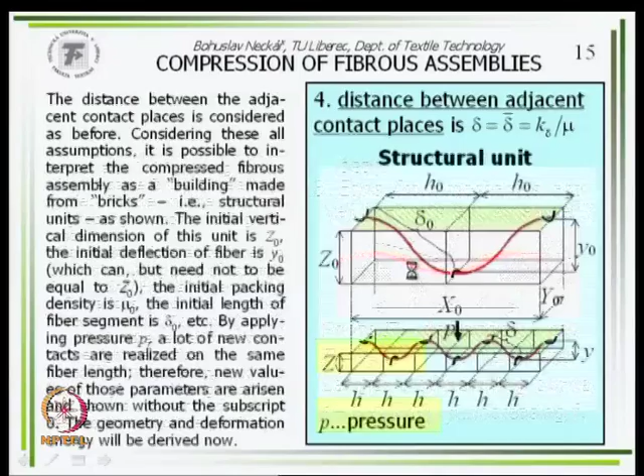Nevertheless, for this force F, our colleagues from mechanical engineering derived such an equation - here it is, yeah? Only the quantity of deflection I now call eta. So it is this here. After that we must integrate this from the starting position to the final deflection y, so that we obtain this here, finally this here. This is the energy per one fiber portion of length delta.

How is the total energy? The total energy is energy per one segment times the number of segments, so E delta times M delta. Using this expression, we obtain this after rearranging. After rearranging we obtain this here, but here is y squared, and here is h to the power of 2, 3.

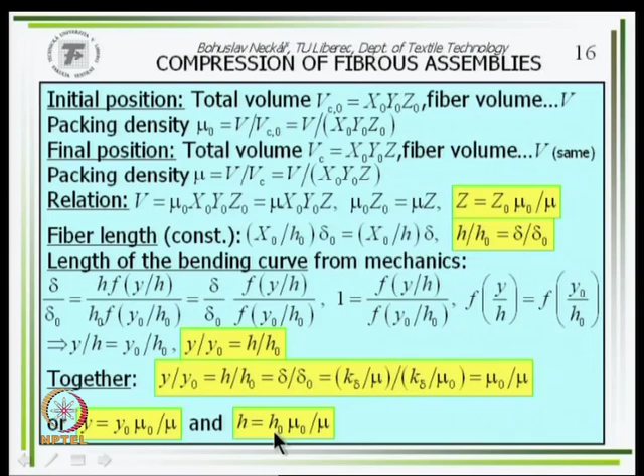Nevertheless, we know what y is - for y we have this expression, and for h we have this one. We use it, obtain this here, and after small rearranging, we obtain that the energy is something in brackets, some global parameter, times mu squared. This is the energy, and in the final position the structure has the packing density mu.

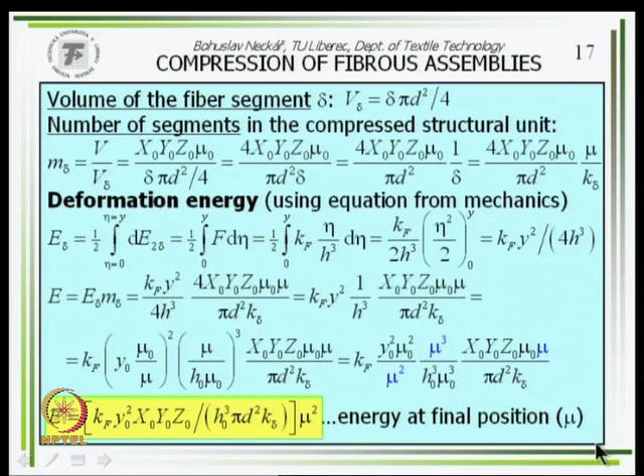Thus, on the starting position, the starting value of energy, which was in our fiber bundle or in our structural unit, is E0, and it must validate the same equation with packing density equal to mu0. This is the initial energy, so that the increment of energy delta E is this ratio times mu squared minus mu0 squared.

Now we need to formulate the work done. Work is a process. I have some starting situation, then I give some work, and I finish on a final position in a deformed object. So therefore I must use three types of quantities: starting value, general value on the way, and the final value.

For example, packing density - there are symbols which we will use. Initial value is mu0, final value is mu, but through our activity, the general value on the way from mu0 to mu is mu star. Vertical coordinate, I call z. Starting was z0, final was z, and on the way was z star. We derived that z is z0 times mu0 by mu, and similarly this equation is valid. On the place of mu and z, I use the star superscript, which are the quantities on the way from starting position to end position.

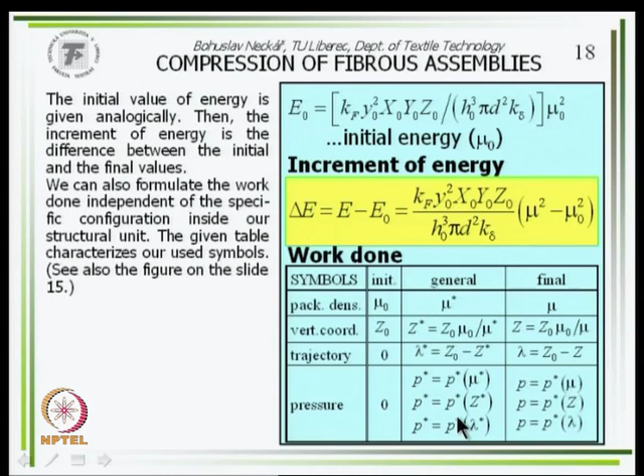Yes. How is the work done now? Same idea. The elemental incremental increase of our work is force times the differential quantity of the length. So how is the force? The general force on the way - pressure, for example P star as a function of lambda, times area x0, y0 as in our picture. So this is force times d lambda star, because it's some general characteristic of our way through which we press.

Now we can apply substitution twice inside of this integral. First is this here, then the second is this here, and finally we obtain work done as x0, y0, z0 times mu0, times the integral, because we need to sum these incremental works together. The integral from mu0 to mu of this expression. Here we have the pressure as a function of packing density - it is this function which we want to obtain, the relation between pressure and packing density. So it is a formula for work done.

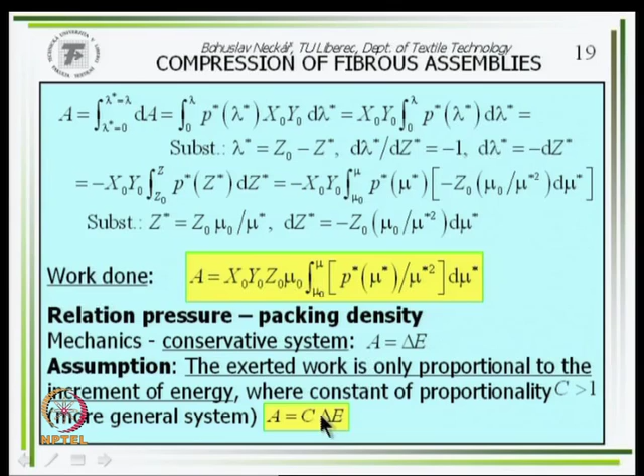Well, so let's use this equation, and on the place of A and delta E we will use our expressions derived earlier. So we obtain A equals C times delta E - it is this here. After small rearranging, we obtain this. Well, it's nice, but not too nice, because our function, pressure as a function of mu, is inside of this integral. What to do then?

Evidently, make some derivative, because it is inside of the integral. So make some derivative. Let's make the derivative of the left-hand side as well as the right-hand side - the derivative of this side by mu.

Derivative of the right-hand side by mu is very trivial, since mu is only here. But the question is, what is the derivative of the left-hand side by mu? Where is mu? There's no mu star, that's the integrating variable. Mu is the final variable, the upper limit of this integral.

The question is, how is the derivative of an integral where the variable is the upper limit? I hope you know from mathematical analysis that this derivative is some expression known from mathematics: this derivative is the function where, on the place of the integrating quantity x, now is the upper limit y. It's some formula from mathematics. After our lecture we can derive it mutually, it's very trivial.

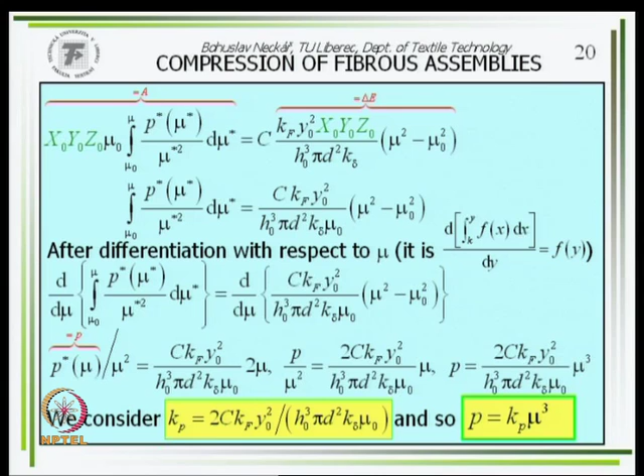Pressure is proportional to mu to the power of 3. This is the result of Van Wyk's theory, from direction to relation of pressure and packing density.

Van Wyk studied how it is now with experiment and was very happy. He worked in South Africa, where they used wool fibers, merino wool at most, and pressed it into bales, and it was in very good relation to his experimental experiences. So, Eureka, this is perfect. From that time, a lot of people use Van Wyk's formula.

Nevertheless, this formula is not well enough for all packing densities. You can see this fast when you apply this formula to the modeling of yarn internal structure, yarn packing density, and so on - your result wasn't good. Something is not right. Let's see how this equation is.

P is proportional to mu to the power of 3. So it goes over, so that at a sufficiently high value, P represents Kp times some real constant. So when you use some finite value of pressure, you obtain mu higher than 1. This curve goes so that from this value of pressure onward - this is pressure and packing density.

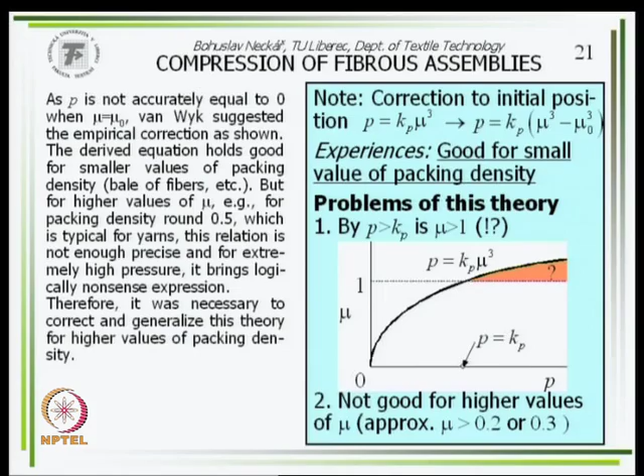Why? In the system, the model of Van Wyk, which is good not only for wool fibers, a lot of other authors checked this equation and said yes, this equation is good for packing densities of maybe 0.2 to 0.3. When your packing density is 0.3 and smaller, then you can say that this equation works very well.

But why is it not good for higher values of packing density, which we use for example in yarn? In the yarn we have packing density at most between 0.4 and 0.5, 40 to 50%.

Why is it possible? Because to solve this problem, to this moment it was a pure Van Wyk theoretical concept - only the derivation was a little different, I used a little other way to obtain it. But as a theoretical model, the result is still Van Wyk's model.

Because of this problem with such a model, we derived some generalization of the Van Wyk concept. It is based on the following idea: the contact between two fibers is usually not only a point contact. There exists some small area, a contact area, between two fibers.

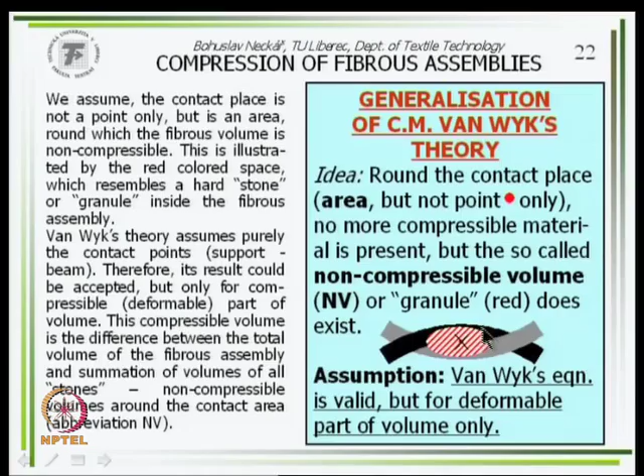And around this contact area, the volume functions as a stone inside, let's imagine it. With this part of my finger I can move with these two, but here it is like a stone - some small stone, some granule. So this is some non-compressible volume, isn't it?

So we said to ourselves, okay, it is a non-compressible volume, and Van Wyk theory is valid - well, it's valid, but not for the whole volume of the fibrous assembly. In each moment it's only valid for the deformable volume, which is the total volume minus the volume of such stones, which are non-compressible. Can you imagine it? I think principally yes.

So let's give the following idea. Earlier, Van Wyk's original equation is Kp times mu to the power of 3, where mu is fiber volume by total volume, both to the power of 3. This equation is this relation of two quantities, P and total volume. Volume of fibers is practically the same, yes, we say no, total volume - we must in this place give the deformable volume, which is total volume minus the volume of all our stones, our granulas.

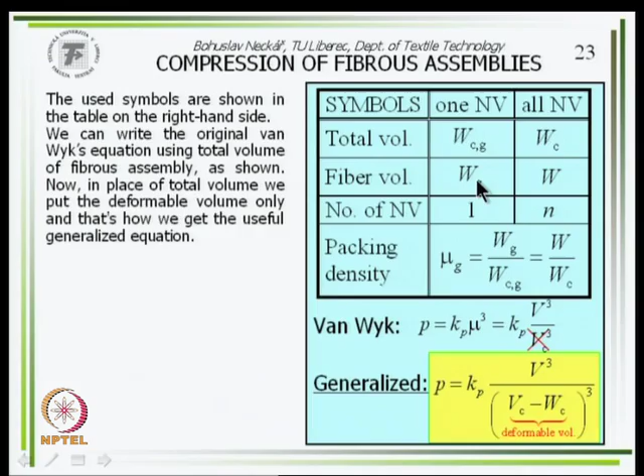The problem now is to formulate how the non-compressible volume of all granulas, the volume WC, and this WG volume, fiber volume inside one stone, one granula, one non-compressible volume, is generally not constant.

Because do it subjectively with your fingers: by light contact, you can feel that this volume is small, this non-compressible volume is small. Also the fibers, volume of fibers in the whole granula is small. From the other side, when we have some contact which is very intensive, the contact area is large, whole granula is big, and the fiber material inside our granula, the volume of this is high.

So volume of fibers inside one granula is related to packing density of the whole structure. When we have higher packing density, the volume is higher. So it's some function, an increasing function of packing density. It must be so. Acceptable? Yeah. Sorry, we have not a theoretical model for this moment, we only know it is some increasing function.

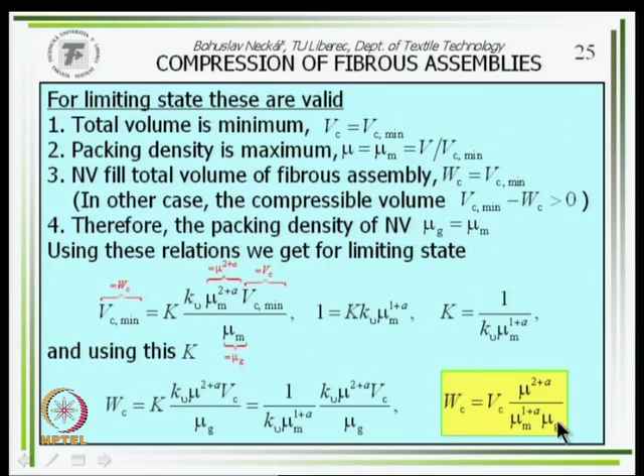And now we have two packing densities here: maximum value of packing density, and packing density inside of granula. We can well imagine that both are the same, that inside of granula is every time a maximum packing density. Only a small necessity gaps inside fibers.

Then, using this assumption, we obtain the W with subscript C is VC times mu by mu m power to 2 plus A.

And this we use in place of our generalized idea: total volume minus volume of all non-compressible parts. After small rearranging, using the packing density as fiber volume by total volume, we obtain this here, and finally we obtain this equation.

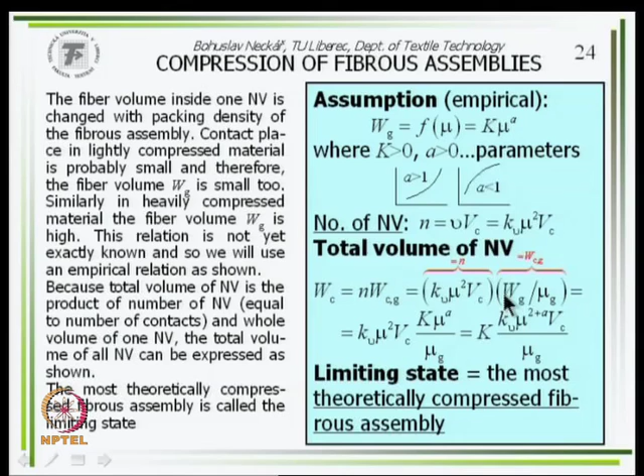Based on our experiences, mu m is usually very near to value 1, maximum packing density, and the parameter A, which is here, based on our laboratory experiences, this A is near to 1. It means this relation is straight.

And then we obtain such curve, such diagram: pressure, packing density. This is our new generalized function, and this is the original one, Van Wyk's curve.

In the region of small packing density, we obtain roughly the same graph, same shape. Then by higher values, our new curve is limited to maximum packing density, something which is very near to 1. It's possible to do some approximation, because it's formally easy, but you can read it later at home.

I want to comment on the relation between our generalized equation and experiments which were done by Baljasov. Professor Baljasov was earlier a known name in Moscow, at Moscow Textile Institute.

He studied experimentally this relation, pressure and packing density, in a very large interval of pressure, from 0.0003 megapascals to 328 megapascals. He used for smaller values our breaking machines.

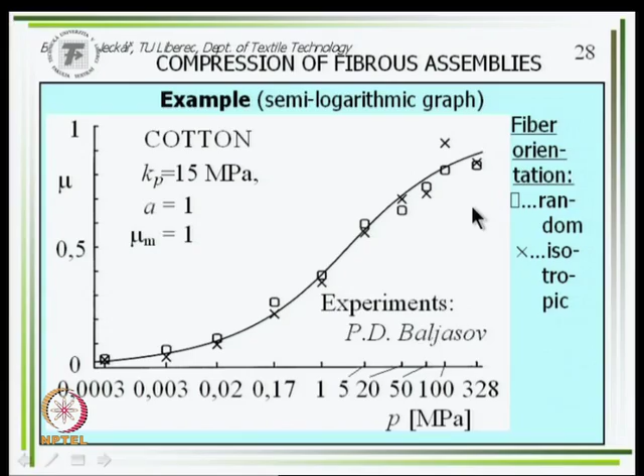Higher value, it is the production of fiber boards. It is not textile technology. So you can see that this result is very good, acceptable.

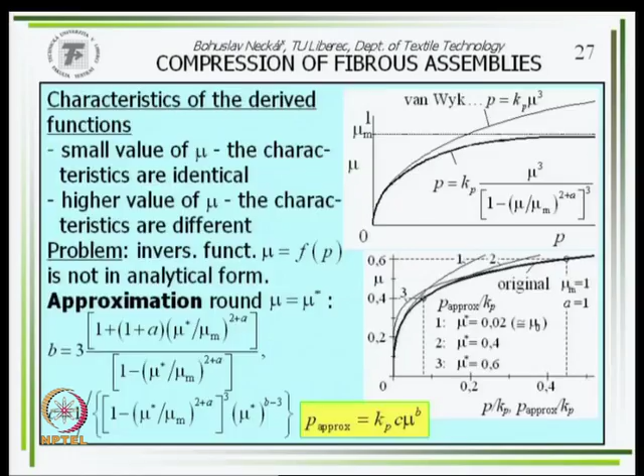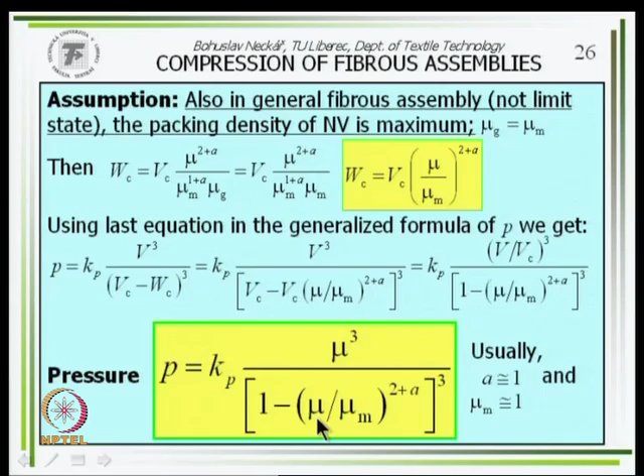We will use it in one of our later lectures about the yarn structure. We will use this final equation, this one here, also as an input to the model of internal yarn structure. To this one now, only some short notes.

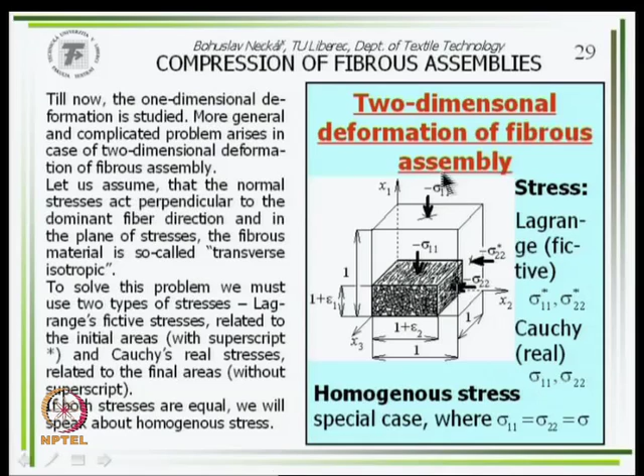It's possible also to generalize this result to two-dimensional deformation, which is schematically shown here: the deformation of fiber assembly in two dimensions, two directions, two axes. And then, as an approximation, we obtain such equation.

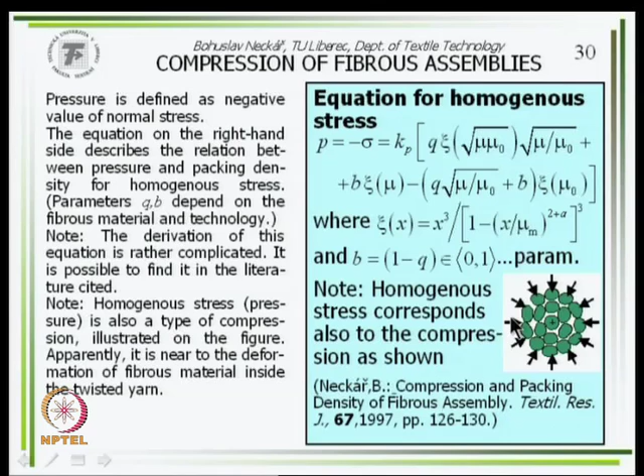It's by a small approximation we obtain such equation for pressure, for this pressure. For homogeneous stress, it corresponds also to the compression as shown. For homogeneous stress we obtain roughly this equation, which is identical, only with some other parameter, before this relation here.

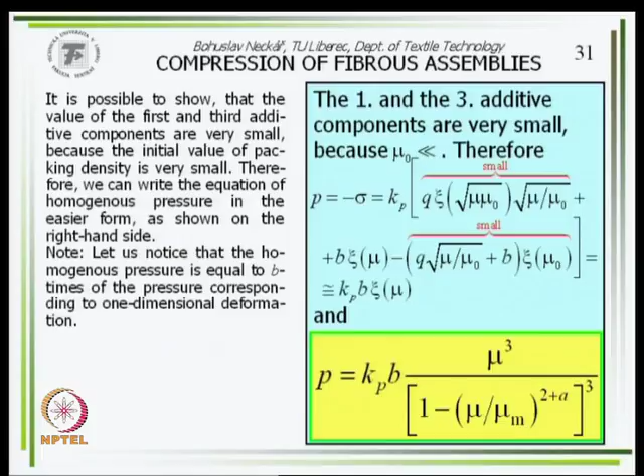So therefore it is possible to use this type of equation also in modeling of the yarn, which we will see in our later lecture. Well, it's all for today. Thank you for your attention.